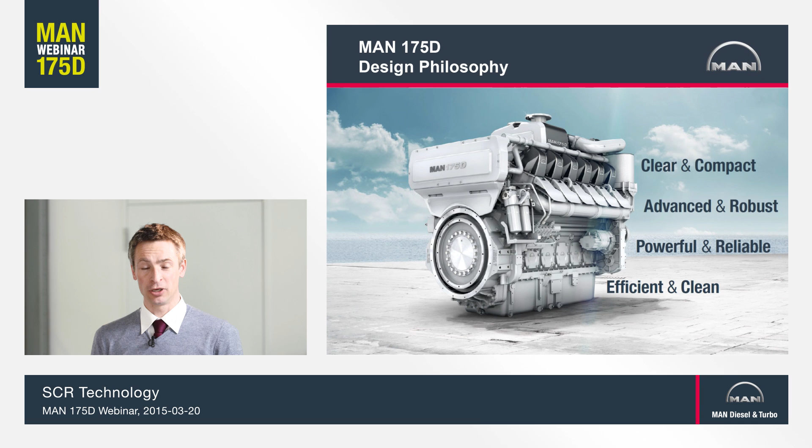Advanced and robust, meaning we have the highest peak firing pressure, which we translate on the one hand into robustness, on the other hand our, I would say, really key statement, efficiency. We want to serve you to have the most efficient engine that is out there. And for life cycles that you have 10 years, 20 years, even more, this is really where you get your value back. Clean, this is the topic which we really talk in detail today about.

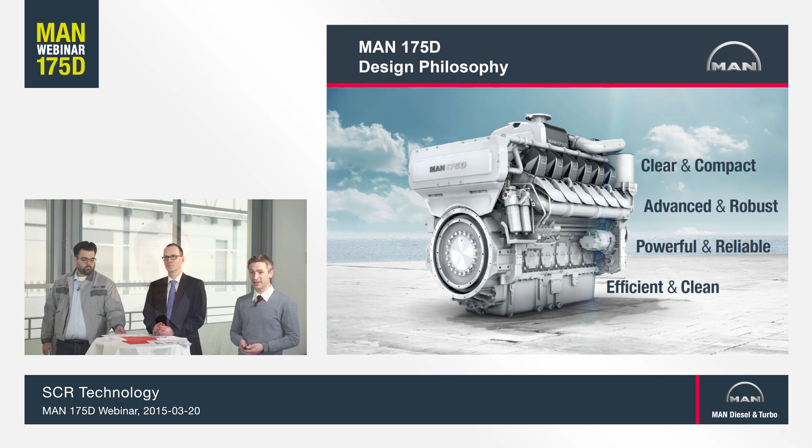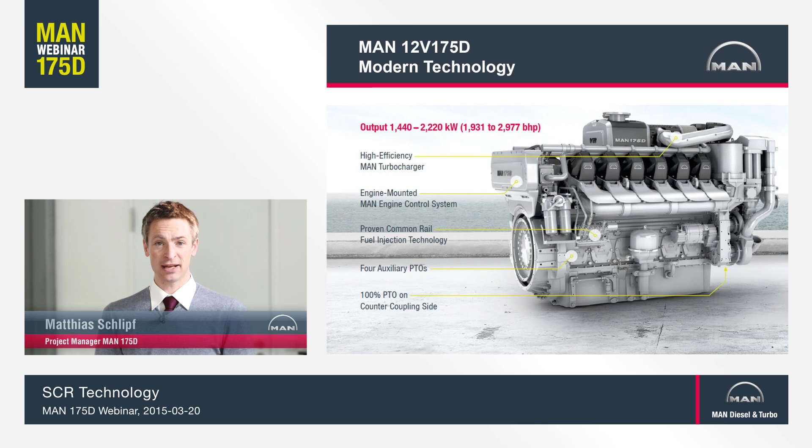Clean meaning fulfilling all the emission requirements that are out there in the world. Maybe a few more words to the engine. We have our own turbocharger system, own electronics. We have an advanced common rail system and a lot of different options giving you flexibility, meaning four PTOs, especially important for the commercial marine market, but also flexibility, 100% power takeoff at both ends of the engine, so you can turn it, and other intelligent features.

When coming to the value proposition for our customers, this is quite simple. If required, we offer you the complete system, the complete propulsion train, starting from the propellers over the gearboxes to the engine and ending up with the exhaust.

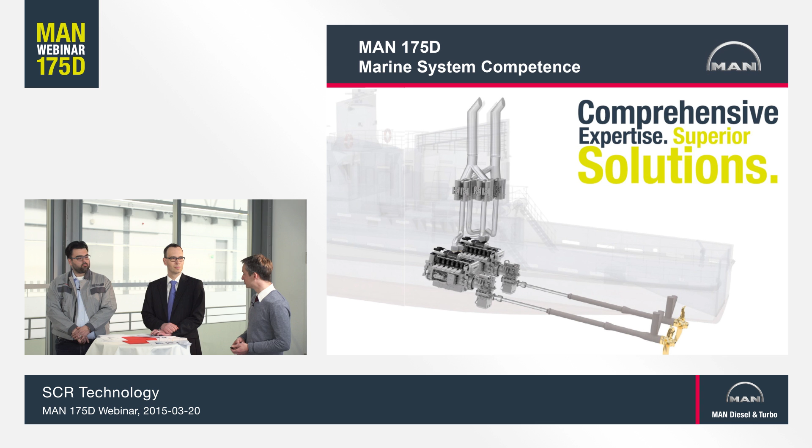And exactly the exhaust system, this is where we want to focus today about, because it is just a burning topic. I mean, IMO Tier 3 is there, US EPA Tier 4 as well. And we designed in a very modular and flexible way an SCR after-treatment system that will fulfill all emission regulations that we have currently. And this is where my dear colleague Andreas comes into the game. Andreas, it's up to you.

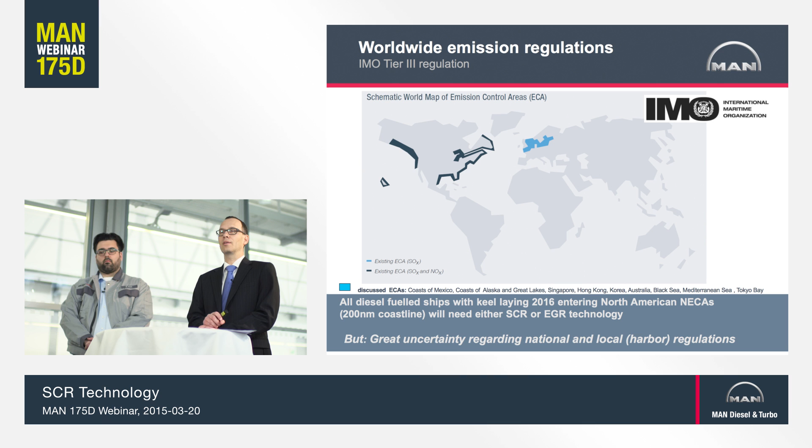Like shown here on the first slide, these NECA areas are taking place from 2016 on. But you not only have to focus on the NECA zone established in the US and Canadian coastlines, you also have to focus on local regulations, harbor regulations, national regulations. This gives great uncertainty into the market, and the 175D and its after-treatment system has to fulfill these requirements.

Like Matthias already mentioned, before we started, we had this blank sheet of paper asking us what do we put on this paper? So we visited our customers. We asked them what are the key factors and key topics we have to focus on?

We asked yards, we asked end customers, we asked people from the truck and boat industry, and all these people had different priorities, but it boiled down to three major topics everybody is concerned of and asked us to take care of.

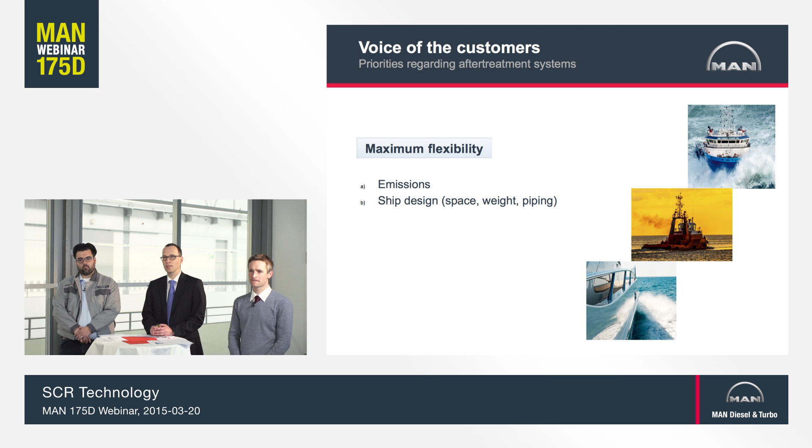The first topic is maximum flexibility, meaning flexibility regarding emissions. So nobody wants to be limited from sailing into special areas of the world because the ship doesn't fulfill the local requirements.

The second thing is everybody understood that you have to put something onto the vessel to fulfill these requirements, but nobody really wants to change the design of the engine or the ship, or wants special requirements regarding pipe routing or whatever.

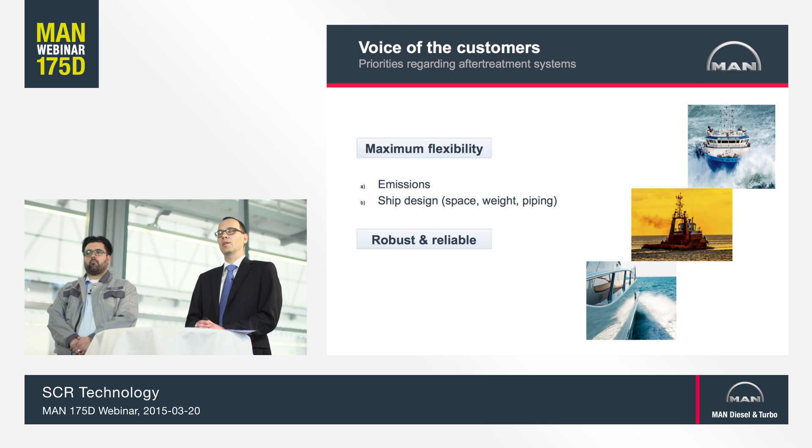So the second is robust and reliability. Like Matthias already mentioned, that's one of the key values we have to take care of. The system has to be robust and reliable. And up to now in the marine market, there are some SCR systems that are not robust and reliable. So we focus on this, and it's a very important issue.

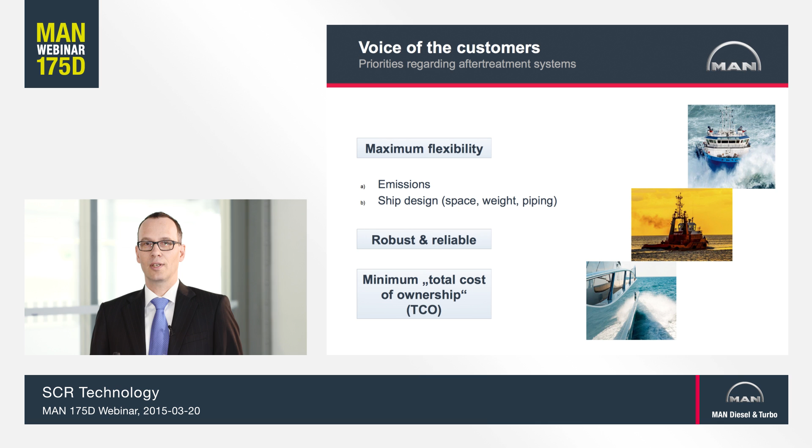And the last thing, that's always the case in this marine business and also in commercial and all the markets, they take care of TCO, so total cost of ownership has to be reduced and kept at a minimum. So how did we approach this issue?

Like Roland already mentioned, there's a close collaboration with our sister company, MAN Truck and Bus. At MAN Truck and Bus, they developed SCR systems for the Euro 5 and Euro 6 legislations. Up to now, they have sold already 300,000 units with roughly 55 billion kilometers on the road.

And here at MAN Diesel and Turbo, we've put power plants and marine applications into service with roughly 800 megawatts and 200,000 operating hours. So we combined these two systems to come up with a combined, compact and reliable system I'm going to show you now.

Before we start with the special 175D after-treatment system, I will give you a short introduction into SCR technology. SCR means that you decompose nitrogen oxides by using ammonia. This takes place at the so-called SCR catalyst.

Ammonia is a toxic material, so we don't use ammonia, we use urea. This urea will be injected into the exhaust pipe, and it decomposes to form ammonia, and this ammonia is used to decompose nitrogen oxides.

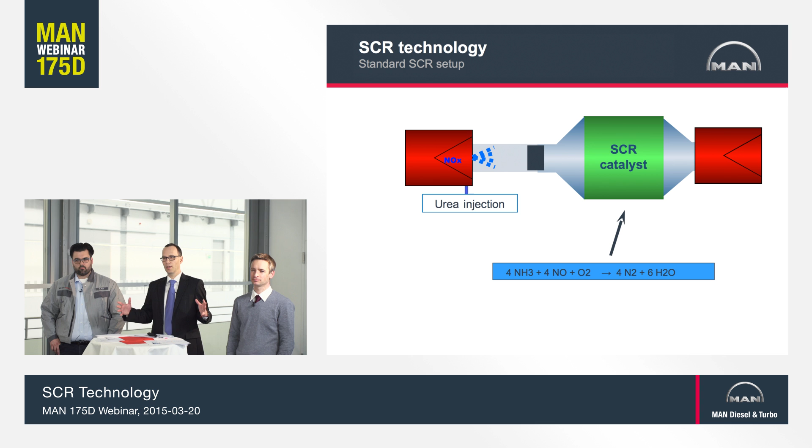So that's a standard setup of an SCR system you can see here. But what's important is you are somehow limited regarding pipe lengths and where to position the reactor, because you have to keep a certain length of the mixing pipes to get proper mixing between the urea and the exhaust gas. So this was not our focus for the 175D.

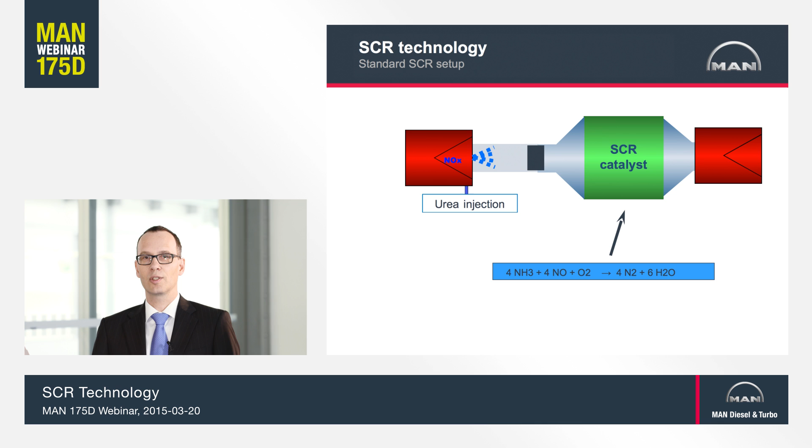Because, like I already mentioned, our customers asked for high flexibility regarding mounting and positioning of the SCR catalyst. So when it comes to SCR technology, the main problem is you have to introduce the urea in a way that you do not form any deposits.

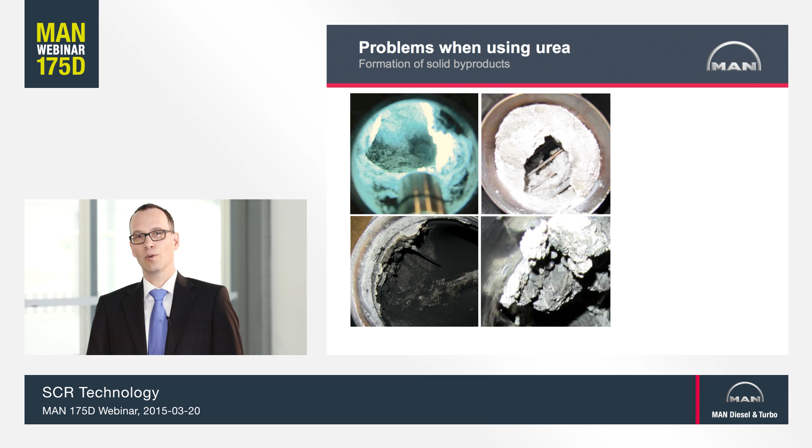These are some disaster pictures from our earlier experiments where you can see that if you don't do it in the proper way, you may block your exhaust pipe, and this may even stall your engine.

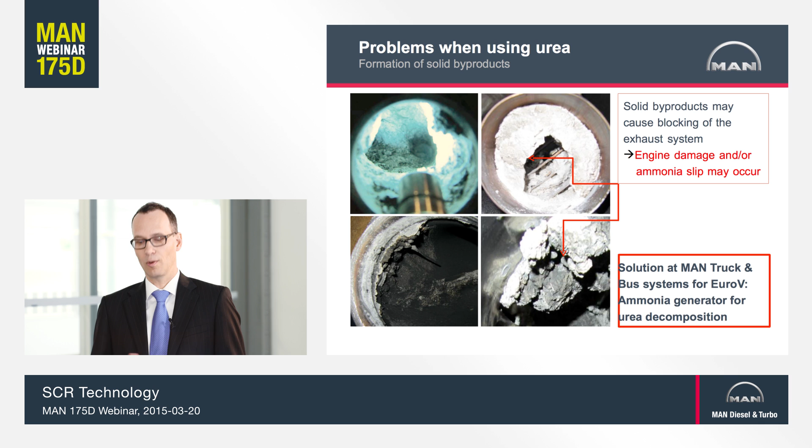So the solution at MAN Truck and Bus, our colleagues from Munich, for this problem is they use an engine-mounted ammonia generator. At this ammonia generator, you decompose the introduced urea and form ammonia. And from downstream of this ammonia generator, you don't have any problems regarding piping or deposits or whatsoever.

So here you can see the Euro 5 solution from MAN Truck and Bus, where the SCR system has been introduced into the truck business. The important thing about this slide is that there's the ammonia generator very close to the engine, so engine mounted. And the SCR catalysts are mounted in a standard muffler, so it was not necessary to enlarge the space needed for the after-treatment system.

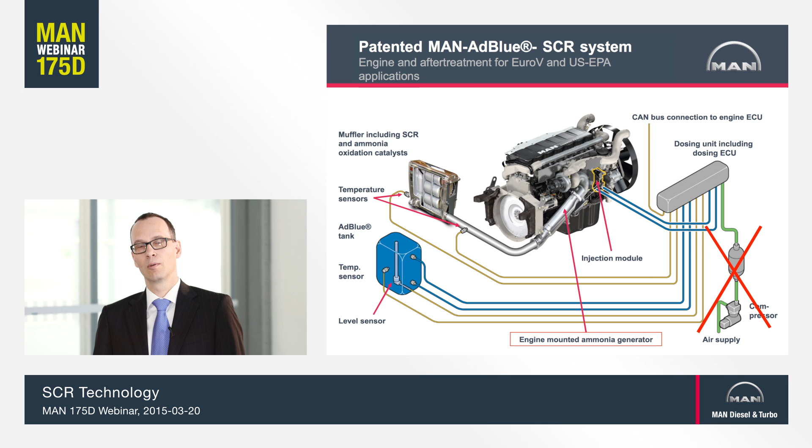We just put the after-treatment system in the existing muffler, and that's the same idea and concept we use here for this 175D after-treatment system. What's important on this slide is for this 175D, we eliminated the compressed air supply that's mostly needed for proper spray. So this could be eliminated.

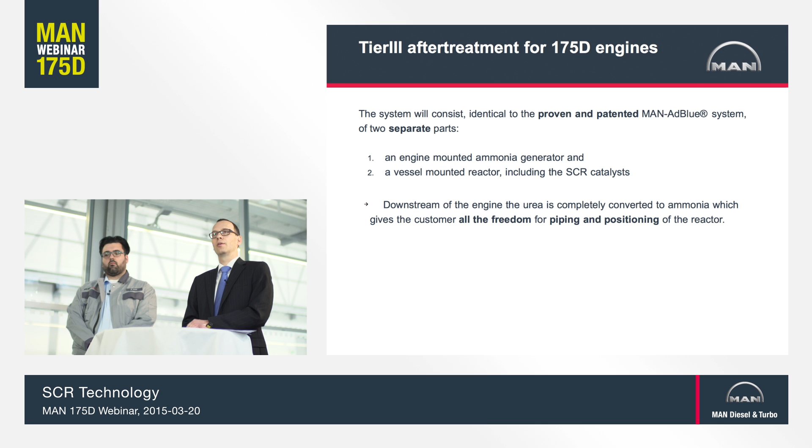So what about this 175D after treatment system? Like already mentioned, we split up the system. One part of the system is engine mounted, so it's a very integrated system, and the second part is the SCR catalyst. By doing so, you are no longer limited to a certain pipe routing or how to orientate your SCR catalyst. You are completely free. You can put the SCR catalyst wherever you want.

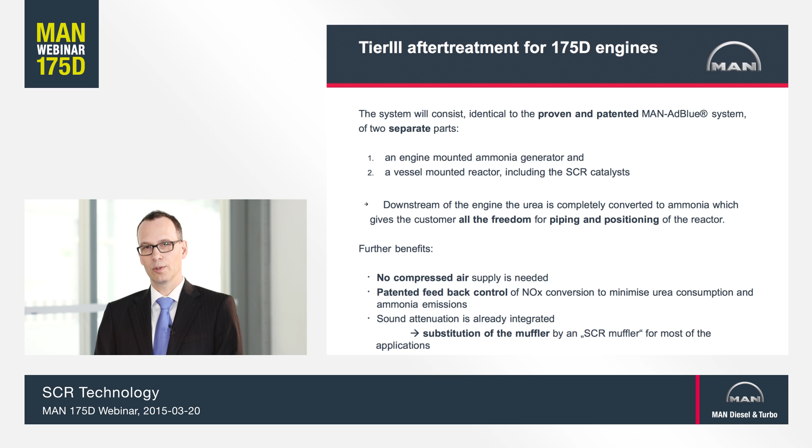Further benefits are, like already mentioned, there's no longer a compressed air supply needed, and they have a patented feedback control. This lowers the urea consumption and also prevents ammonia slip. What's also important is that the development is focused on substituting the existing muffler with an SCR muffler, so we introduce sound attenuation into this system.

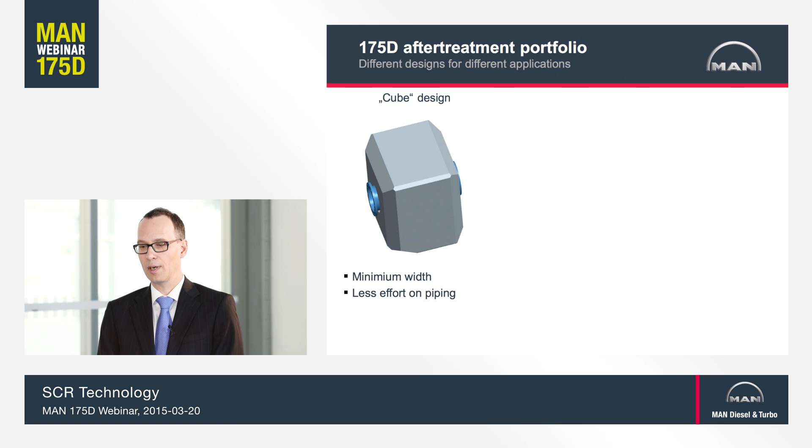But that's not all, we give you far more freedom. We designed two different reactors. One reactor that's called the cube design, that's a design where you have minimum width and less effort on piping. But if you're somehow restricted on height, there's a second reactor that is very flat and you can put it everywhere you want.

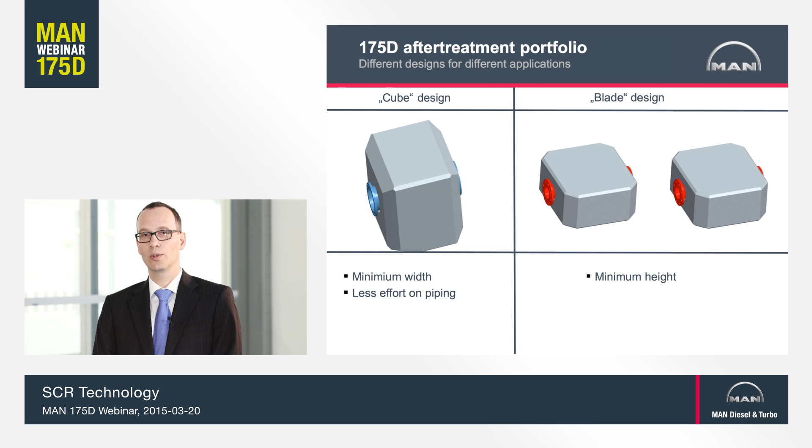Okay, so we prepared a short movie with animations showing you where and how to put the after-treatment system on a vessel. Like already mentioned, we looked at yachts, naval and governmental applications, and commercial vessels. So the first example, that's a yacht example. Like Matthias already mentioned, you can get the whole system from a propulsion train over the engine to the after treatment system. From governmental applications,

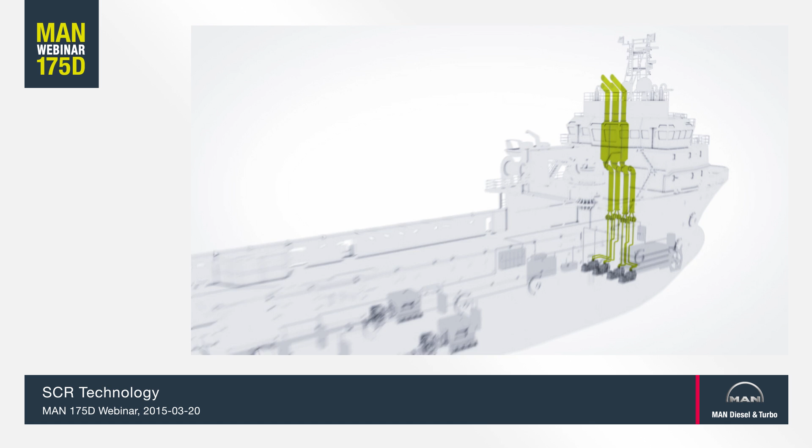the SCR system has been put in the funnel. And for the commercial marine applications, that's a different design and a different location. Here it's beside the engine and no longer inside the funnel.

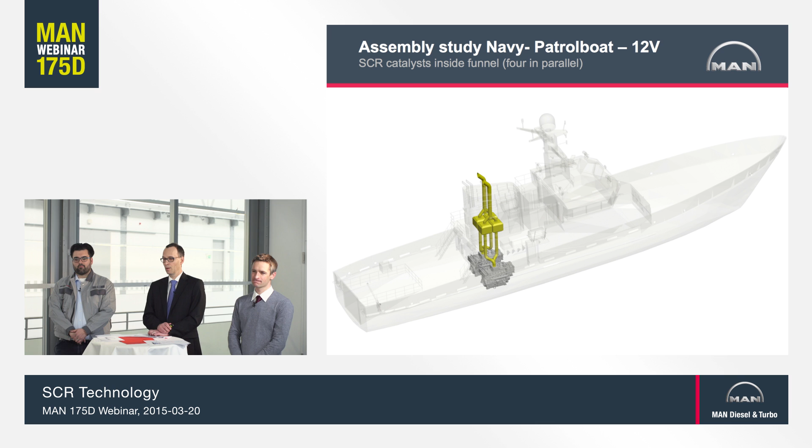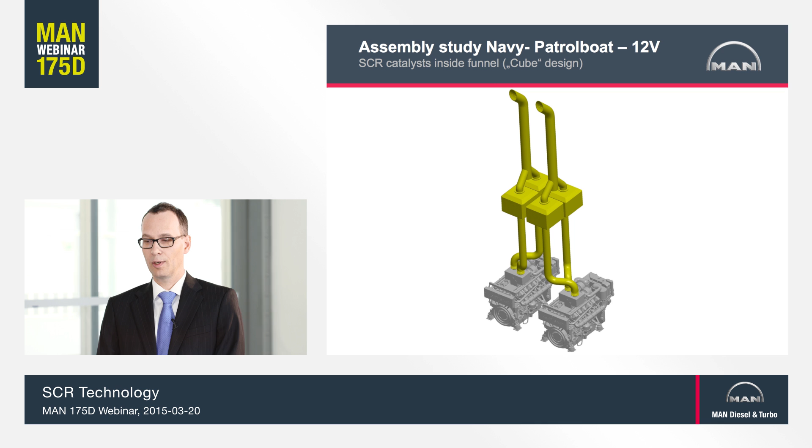As this is an important topic and makes this system unique, I'll go into detail about the different opportunities you as the customer have to position and locate the SCR mufflers. So first, let's take a look at the Navy patrol boat with a 12V 170D, 175D engine. Here the SCR containers or mufflers are located inside the funnel. Here it's a picture of the exhaust piping and the SCR catalyst.

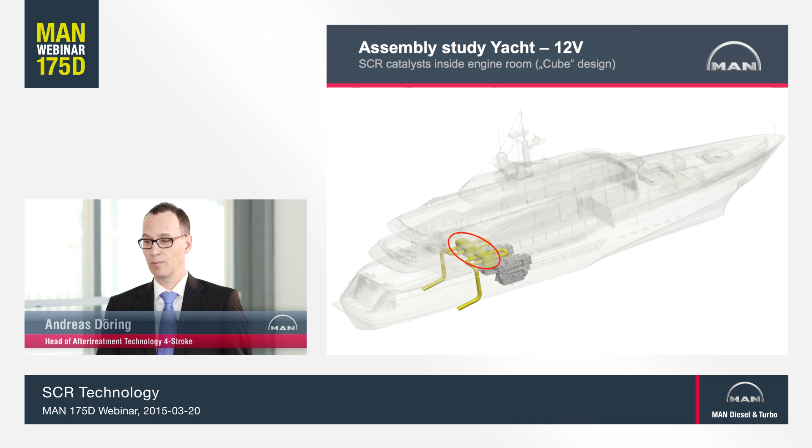Another example, the yacht, where the SCR catalysts are very close to the engine, and I think here it's very clear that there's not a long mixing pipe and a proper way to decompose urea. So here this is a great advantage of our system. The SCR catalysts are right beside the engine and the exhaust outlet is below the waterline.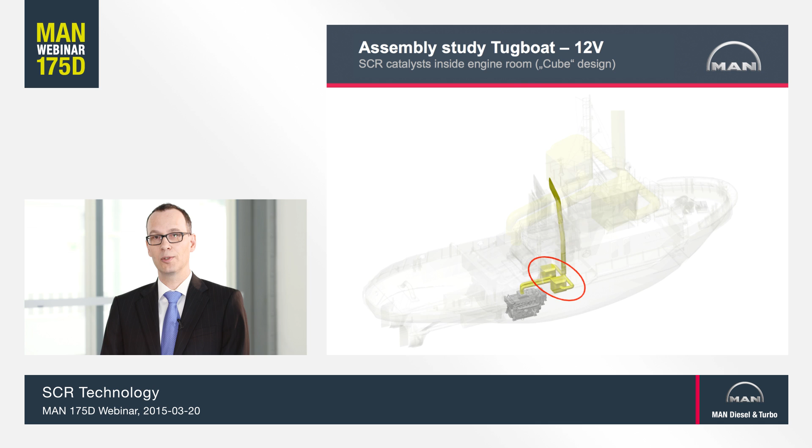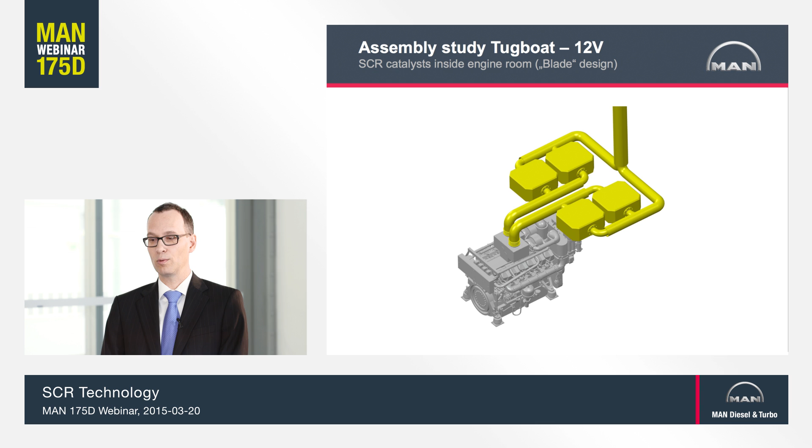That's here, but one interesting topic point about this different SCR reactor designs can be shown here. There the SCR reactors are placed right beside the ceiling, so put on the ceiling. Like here, you have this cube design on the ceiling, but if you don't have enough height in your machine room, it's possible to change this and use the blade design of the SCR mufflers.

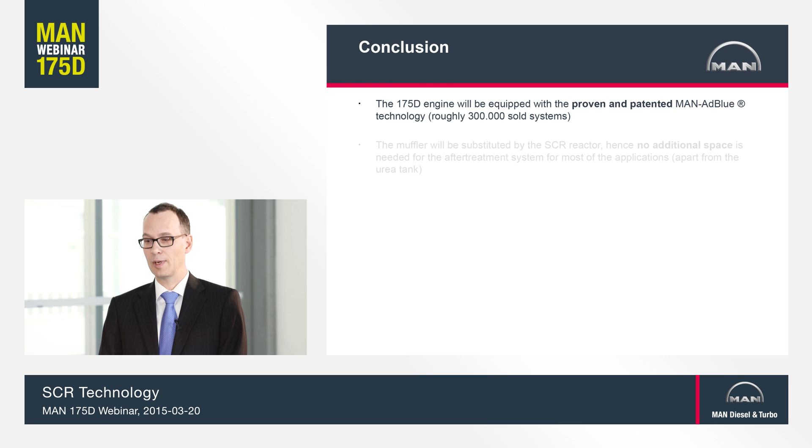So, let's come to the conclusion. The 175D engine will be equipped with the patented and reliable and proven MAN AdBlue technology. Like already mentioned, 300,000 units sold up to now. The muffler will be replaced by the SCR reactor, so sound attenuation is included, and in most applications no special silencer is needed to reduce the noise limits to the limits we have to fulfill regarding SOLAS.

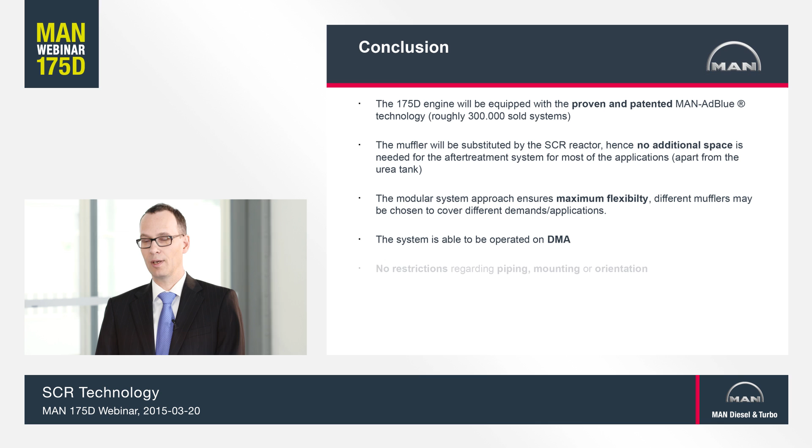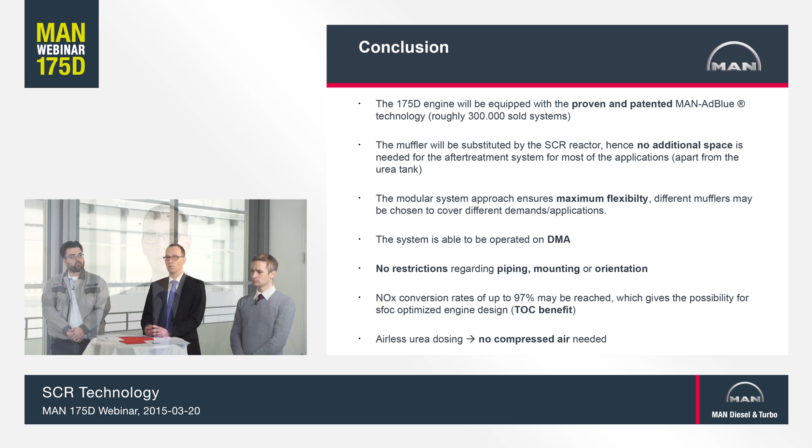It's a modular system that gives you maximum flexibility regarding piping and orientation of the SCR reactor. The system can be operated on DMA, and the NOx conversion is up to 97%. This gives us the opportunity of SFOC optimized engines, so TCO benefit. And the air supply is no longer needed for urea injection, so another important topic to reduce the total cost of ownership.

As named in the introduction to this webinar, you are allowed to ask questions. The first question already we have on the screen: please advise some key considerations for SCR over EGR systems to meet NOx regulations.

That's a very important question. Like already mentioned in the beginning, we visited our customers and asked what are the key values, key components and key topics we have to focus on. One of the key topics is the lowest total cost of ownership, meaning the system has to run on DMA. If you run on DMA with high sulfur levels, it's very difficult to develop an EGR system, because then you run into serious corrosion problems on the engine, coolers and so on. So we have chosen a robust and reliable solution, and that's the SCR technology.

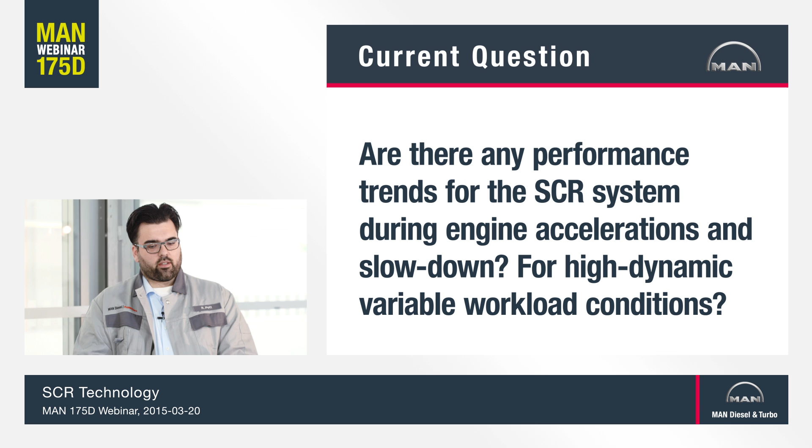Thank you, next question. Are there any performance trends for the SCR system during engine accelerations and slowdown? Or are there special tasks for high dynamic variable workload conditions, tugboats and so on?

That's also a question that has often been raised. Like mentioned already, we developed this system together with our colleagues from MAN Truck and Bus, so the system originates from truck and vehicle applications. There, the load variance and dynamic behavior of the engine and exhaust system is very, very transient. So we took this knowledge and experience and integrated it into our system.

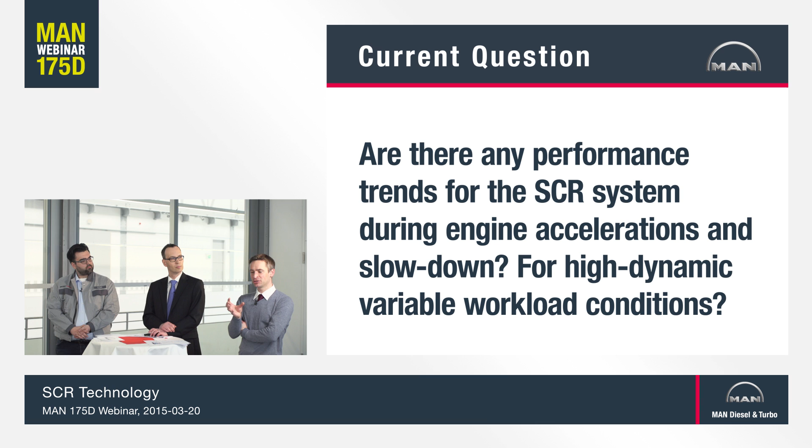Thank you, maybe to add a few words, what Andrea said is exactly right. In MAN Truck and Bus, you have a truck running over the highways for hours and days, with really the same load but in a permanent matter, which you could compare to a ferry operation or offshore service and supply. On the other hand, buses running in city traffic have ongoing stop and go, also a lot of idle mode. This is exactly what we see in the tugboat or workboat business. Therefore, we're very optimistic taking this system from our sister company and transferring it to the needs we have in diverse marine applications for the MAN 175D.

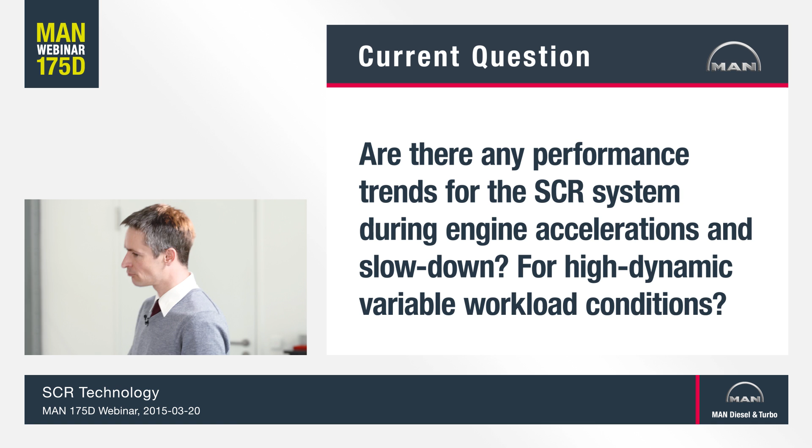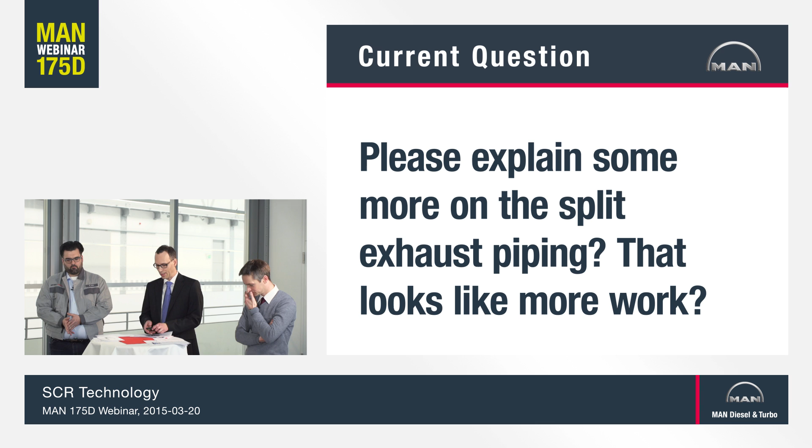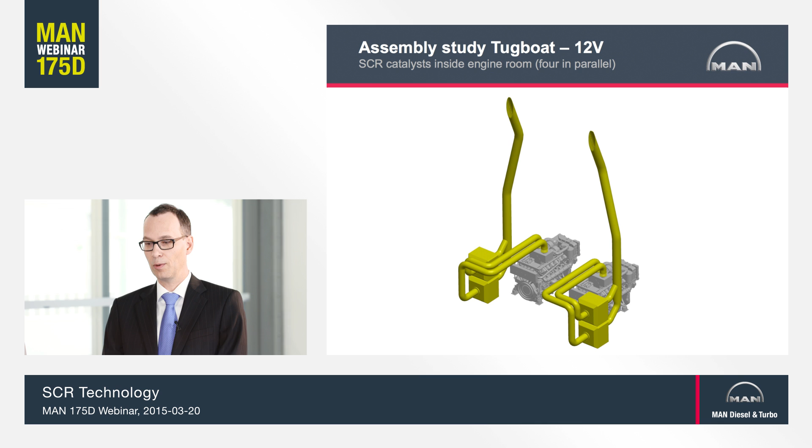Thank you. Next question: please explain some more on the split exhaust gas piping, that looks like more work. From the first glance it looks like more work, but I think this question correlates to this slide. You also have the opportunity to combine the exhaust gas piping. Here you have two exhaust lines feeding two SCR reactors, and you can also combine this to one. It's no problem.

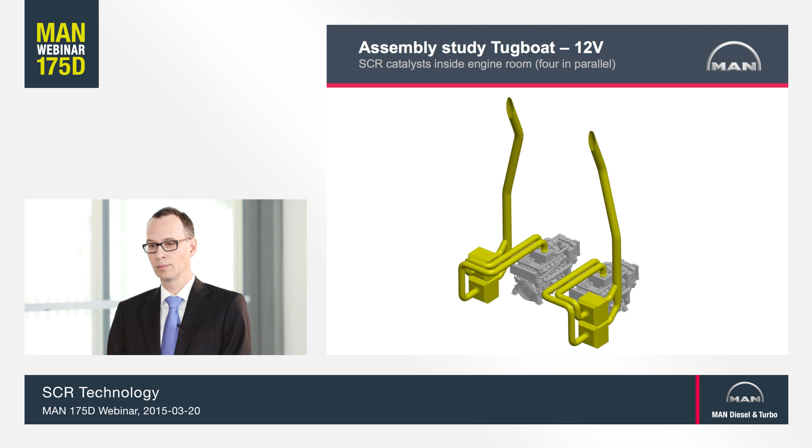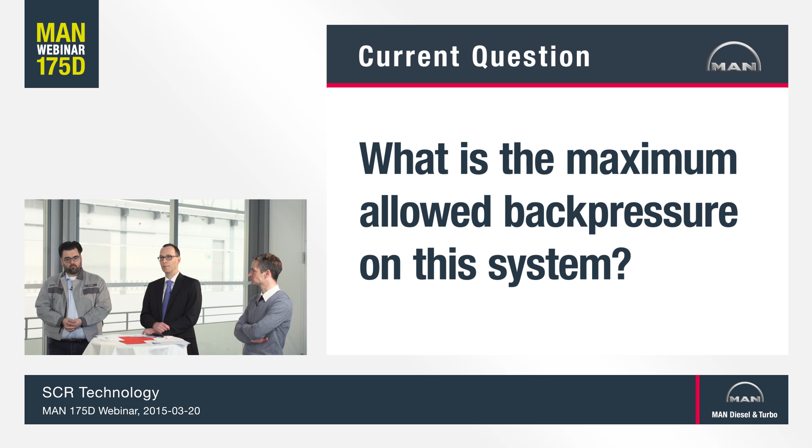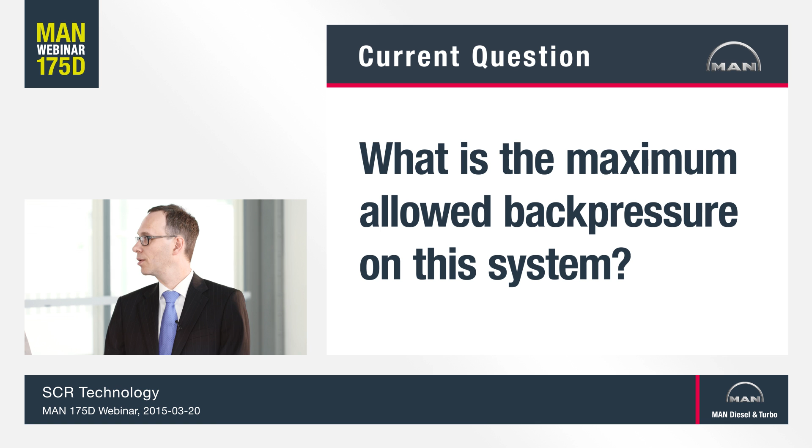Thank you, next question, I guess everybody wants to know this: are there issues, or what is the maximum allowed back pressure on the system? Up to now, the maximum allowed back pressure is 170 and 155 millibars. So that's the allowed back pressure. The actual back pressure is far lower, so this gives the customer the opportunity to add some more components like boilers or whatsoever.

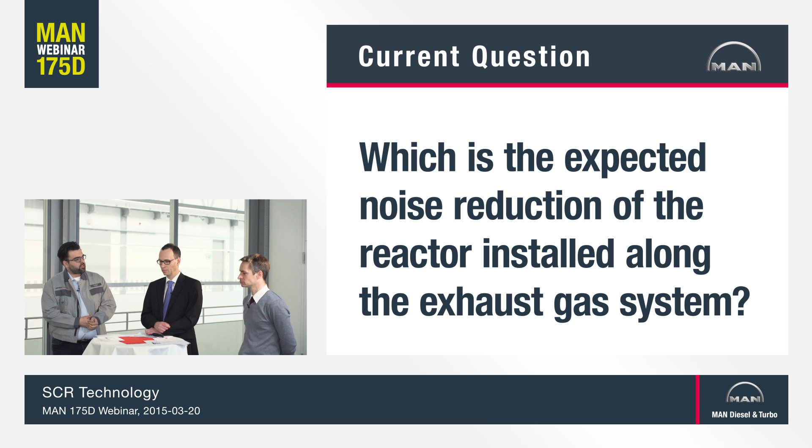Thank you again for this question, which is the expected noise reduction of the reactor installed along the exhaust gas system? Do I need additional silencers or something? It's a very good question. The answer is that we developed the system to fulfill the SOLAS requirements, meaning 78 dBA at the exhaust pipe outlet.

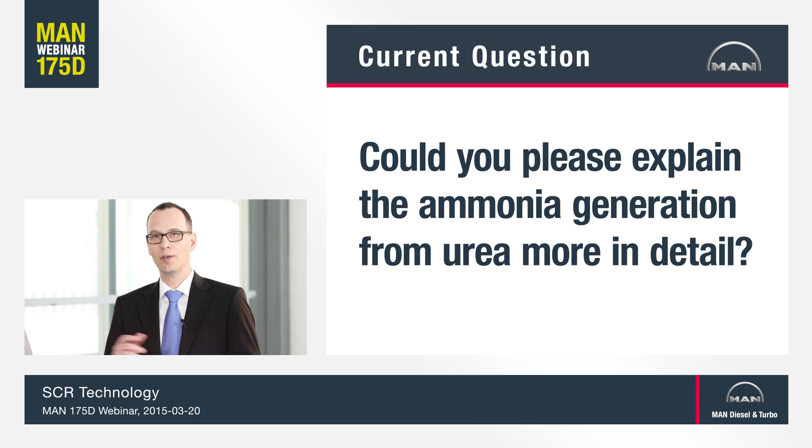Thank you, and I think this is the last question: there's a question for more detailed explanation of the ammonia generation from the urea. The urea is introduced into a special generator. It's a catalytic generator, so it's coated, and we keep the temperature at this generator very high. At this generator, the urea completely decomposes to ammonia and CO2, so you don't get any deposits on this generator.